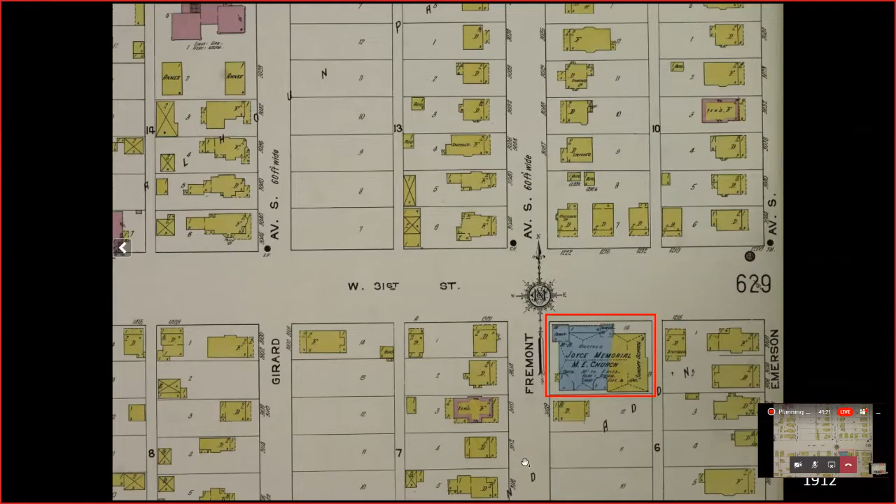In height, that is. The property does not exist within the boundaries of a small area plan or development plan adopted by the city council. It's also important to state that the current property owner has noted interest in developing the property as a multiple family residential building.

Landmark designation would promote the history of Joyce Memorial Methodist Church relayed through its unique California Mission Revival style architecture, and as an emblematic example of master architects Downs and Eads, who were known for creating significant revival styles at that time. The designation will preserve a rare piece of the city's architectural history in an area that experiences significant development pressures. Historic designation of the property would maintain the historic footprint, massing, and community prominence of Joyce Memorial as a neighborhood focal point at the notable intersection of West 31st Street and Fremont Avenue South.

The following policies of Minneapolis 2040 would apply to the designation of Joyce Memorial Methodist Church. Policy 92: identify and evaluate historic resources. The California Mission Revival style is not currently represented in the body of Minneapolis's locally designated historic resources. The property has been identified as the city's best example of a church that retains and conveys significance to this particular style.

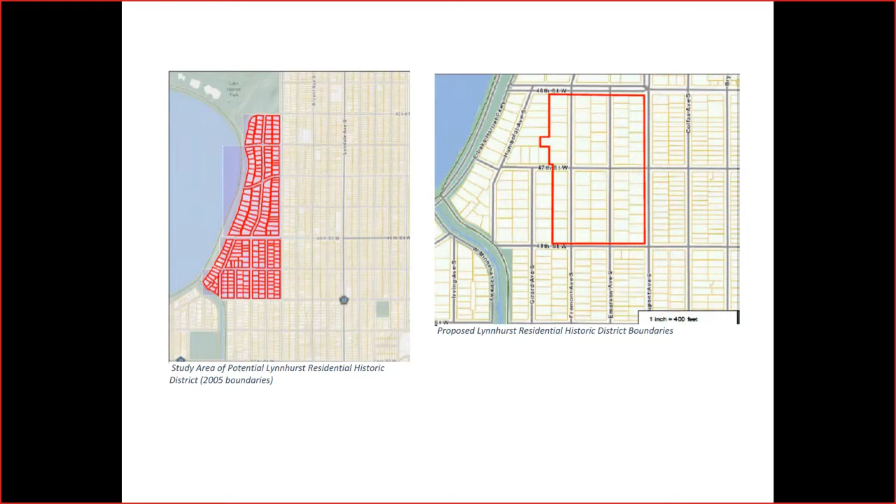In July 2019, the Heritage Preservation Commission placed a portion of the East Harriet and Lynnhurst neighborhoods under interim protection as a potential historic district after denying the demolition of a property at 4632 Emerson Avenue South. After surveying the study area, a local historic preservation consultant, New History, prepared a designation study completed in February 2020. The study area surveyed is bounded by 42nd Street West on the north, 48th Street West on the south, DuPont Avenue South on the east, and East Lake Harriet Parkway on the west.

The study, however, recommends a smaller historic boundary of 46th Street West on the north, DuPont Avenue South on the east, 48th Street West on the south, and both sides of Fremont Avenue South on the west, covering the Lynnhurst neighborhood only. During the study, it became evident that properties north of 46th Street West were larger in size and had more infill construction and substantial alterations.

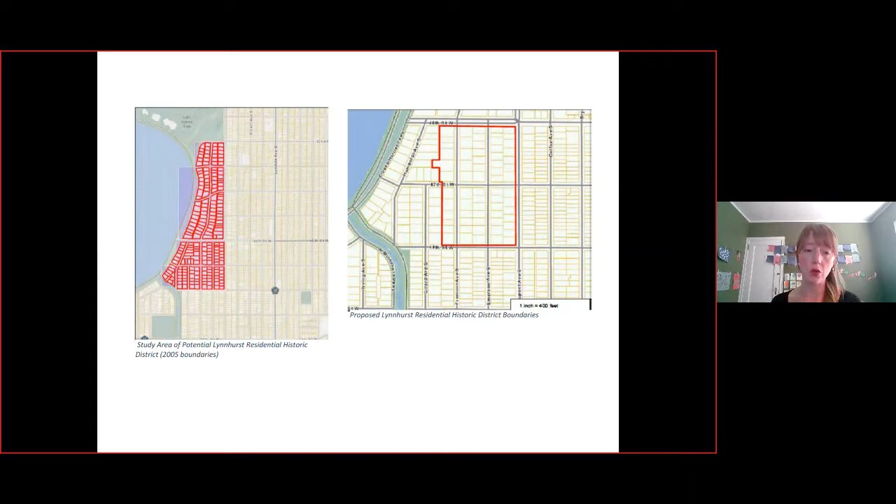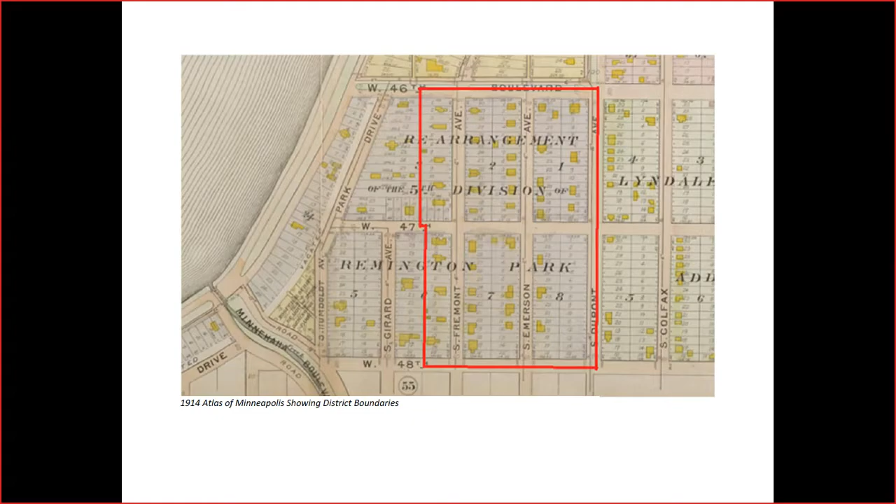The Lynnhurst Residential Historic District consists of 66 homes built between 1893 and 1937. The area encompasses homes that initially made up what's called the colony—9 families who settled on land sold by Charles Loring and built homes costing at least $3,000. The colony remained relatively isolated until after 1905, when additional development was spurred by the arrival of the automobile. The city's emerging upper middle class chose popular architects to design their homes in various period revival styles. Linden trees covered the area, and the lots were large enough to fit a large home and a separate garage. The historic district has excellent integrity, as only 2 houses are recommended as non-contributing.

The historic district has significance under 3 local criteria. Criterion 3 for its large lots, mix of architectural styles popular with the middle class in the late 19th and early 20th centuries, as well as similarities in setbacks, scale, and massing. The district features key character-defining elements of the neighborhood. Criterion 4 for its variety of period revival architectural styles popular during this time.

As well as criterion 5 for its development pattern as an early automobile suburb, with large lots lined with linden trees and houses sharing similar size, scale, architectural language, massing, and setbacks. Under Minneapolis 2040, the district is identified as urban neighborhood for future land use and is Interior 1 in the built form overlay. The designation of Lynnhurst would have no impact on the use of the properties and minimal impact on their built form, with Interior 1 guiding building heights between 1 and 2.5 stories.

Three policies of Minneapolis 2040 would apply to the designation of Lynnhurst. Policy 60: the Lynnhurst District represents one of the highest concentrations of houses retaining historic integrity among the city's designated properties, demonstrating the value of intact historic neighborhoods. Policy 92: Minneapolis doesn't have a historic district quite like Lynnhurst among its 18 currently designated districts—it's distinct because it represents a concentration of middle-class homes in popular period revival styles, and its development depended on increased automobile accessibility rather than proximity to streetcar lines. Policy 93: given the high degree of historic integrity in Lynnhurst, designation will encourage the maintenance and preservation of the houses within its boundaries.

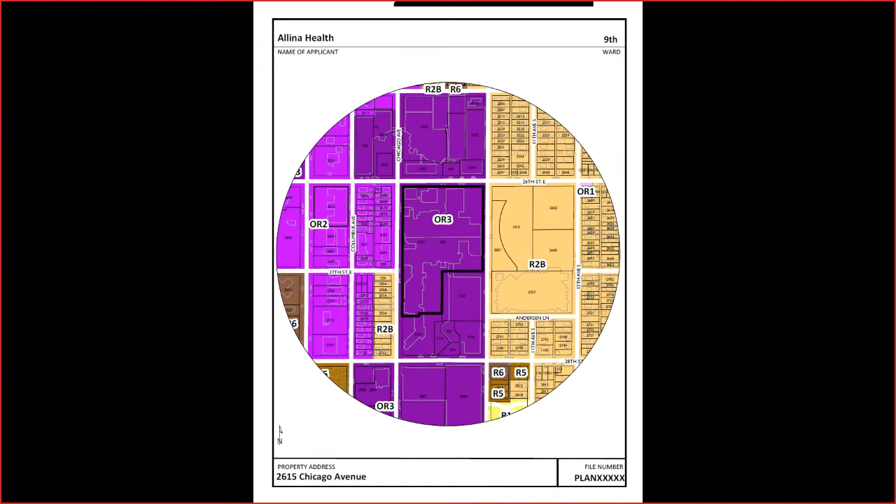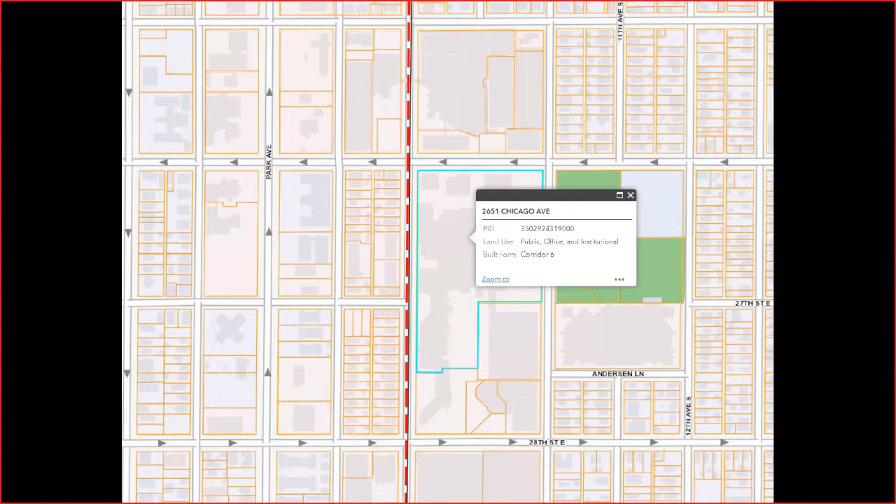The site is currently under the 2040 plan designated for public office and institutional uses and built form of Corridor 6. The portion of this larger parcel we'll be looking at is directly at the corner of Chicago Avenue and 26th Street. Chicago is designated as a goods and services corridor in Minneapolis 2040, which in general supports active and commercial uses.

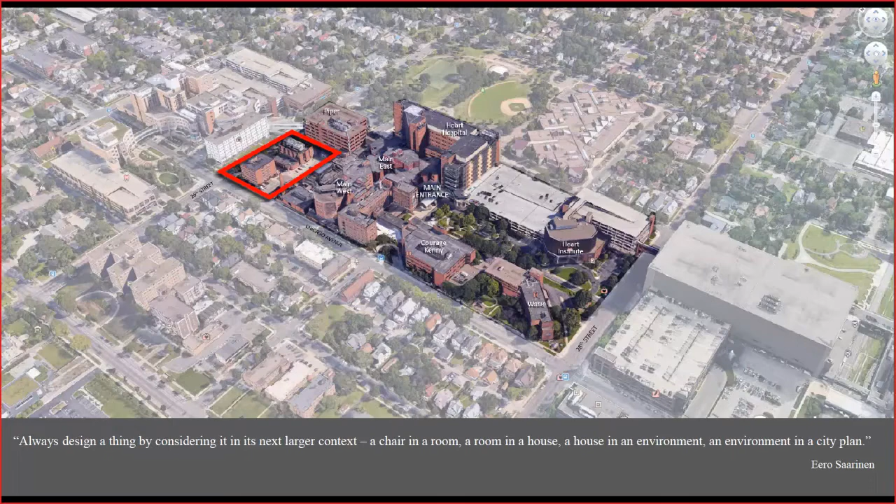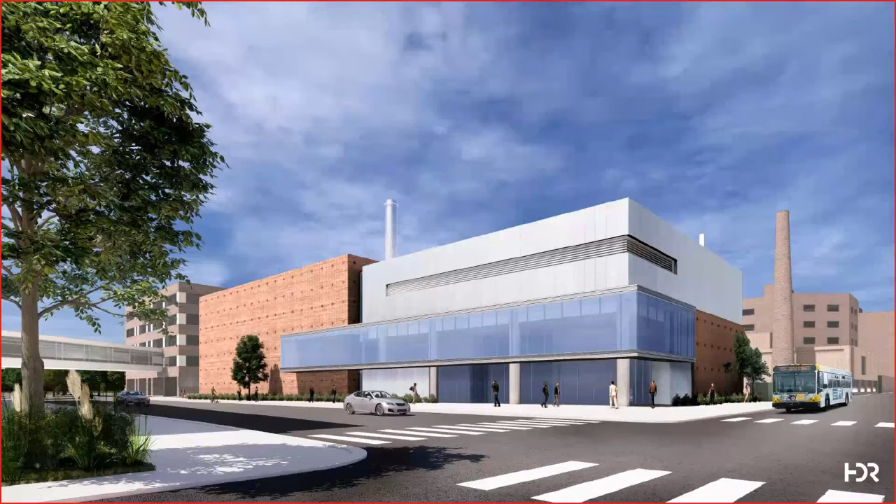So this is an image of the proposal. I'm going to let the applicant handle much of the detail about the design and how it relates to the campus as a whole, but essentially Abbott Northwestern is proposing to replace the existing central utility plant on the campus and construct a new one at the corner of 26th and Chicago. The current central utility plant is located just behind where you see this proposed structure, a little bit further to the south along Chicago Avenue. That plant would continue to operate until the new plant gets constructed, and this new plant would replace two existing structures on the site that would be demolished as part of this project.

So the applications involved in this are a conditional use permit for a new heating and cooling facility, a conditional use permit to exceed the maximum building height in the OR3 district - that's primarily due to the height of the cooling tower that's part of the facility - a variance to reduce the minimum front yard along Chicago Avenue from 15 feet to 0 feet, a variance to reduce the minimum corner side yard along 26th Street from 15 to 0, and site plan review.

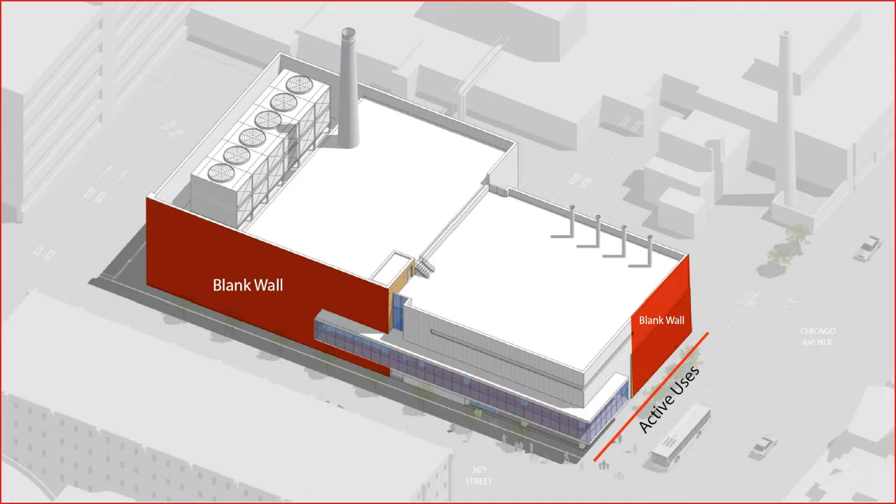So staff is looking for feedback primarily on some design issues with the central utility plant, with the challenge being that a largely inactive program on a very prominent site does not conform to site plan review standards for having active uses on the ground floor along the public right-of-way, for incorporating visual interest into a building design to enhance the public realm, and to mitigate any potential blank wall issues that arise from inactive architectural elevations. Chicago Avenue is adopted as a goods and services corridor and would generally call for the implementation of publicly accessible active or retail uses along that street frontage.

So I'm going to hand it over to Tony from Allina, who will give an overview of the campus master plan and how both of the projects we're going to talk about tonight fit into that. I believe he's waiting on the line.

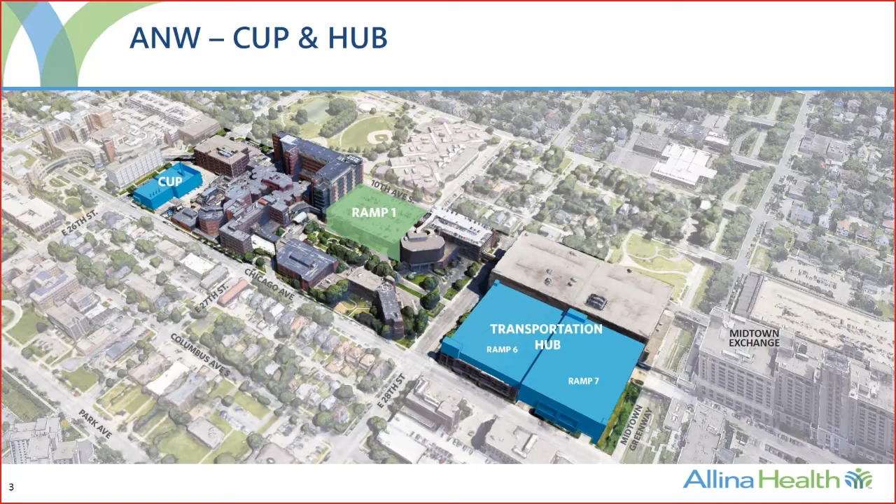Very essential. Our campus is pretty old. We've actually been on the site since 1882. It's important to point out that in addition to this large campus, just to the south of us, our corporate office lives at the Midtown Exchange Building.

They've just recently updated their lease through 2037. So we have a pretty big presence in this neighborhood, and we see that as an honor and also a responsibility to really do things right.

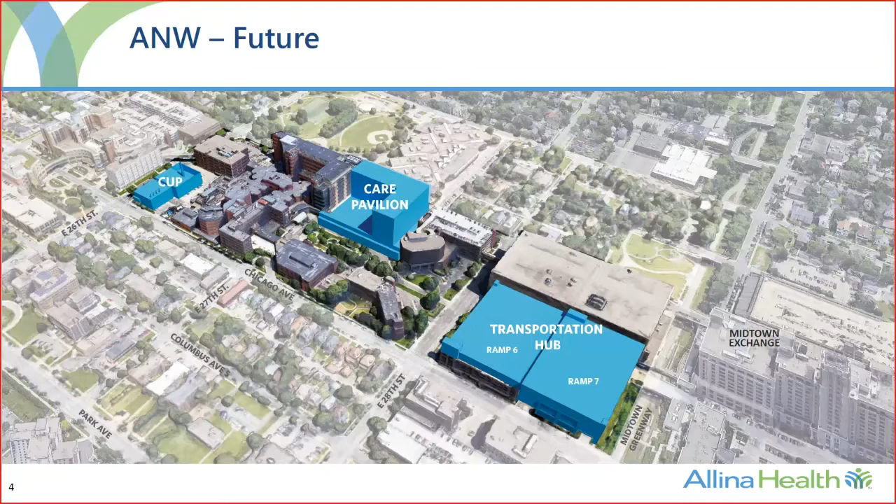Part of this process, as we've been working through this for the last few years, we've had a lot of meetings with our community and our local leaders. We've been really focused on being transparent and engaging our partners and really learning from them. So we've had 21 meetings and presentations over the last 9 months with a lot of local groups.

A lot of local leaders, and we've really taken their input to heart, and we feel like we've really incorporated their input into these designs. As Peter said, some of these buildings have a very industrial nature to them, and we've worked really hard to have something that will look good in our neighborhood. So I'll stop there, and Mike can take over for the CUP project.

Hi, this is Mike McGannon. I'm an architectural design principal with HDR. Thanks for the chance to walk you through the design of the central plant.

As Abbott approached this project, we took inspiration from this Eero Saarinen quote about always designing by considering a thing in its next larger context. In that spirit, we believe it's important to not only make this an integral part of their hospital campus, but

also to ensure that it enhances the streetscape, the surrounding neighborhood, and the overall community of Minneapolis. Our intent here is to create a quietly elegant and functionally efficient design that anchors and complements this prominent corner of the medical campus while continuing to reflect Allina's high quality of care.

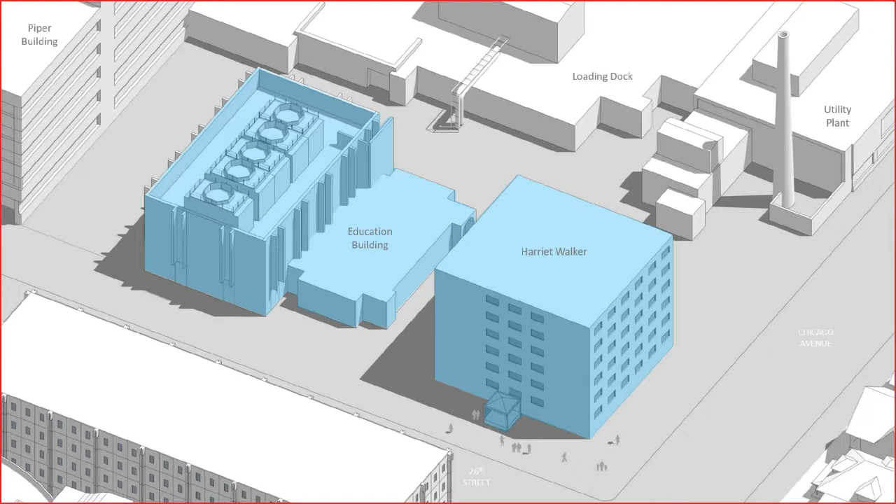So that transparent facade of the staff space consists nearly entirely of glass, and we've recessed it to provide some weather protection and add some visual interest at that front door, some shadow lines.

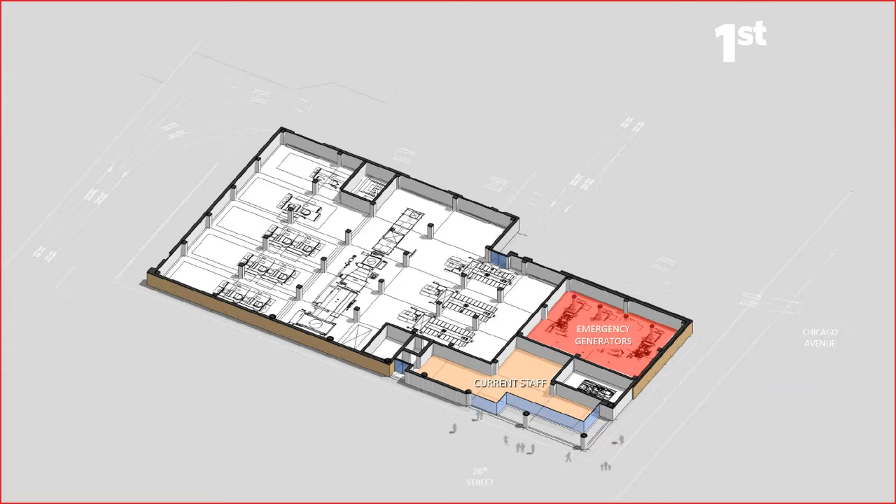Next slide, please. So as we go up one level, you can see the hospital has chosen to invest in shell space for expected growth in staff. So that has allowed us to provide even more floor-to-ceiling glass along a transparent cantilevered spine that you see, again, activating the corner.

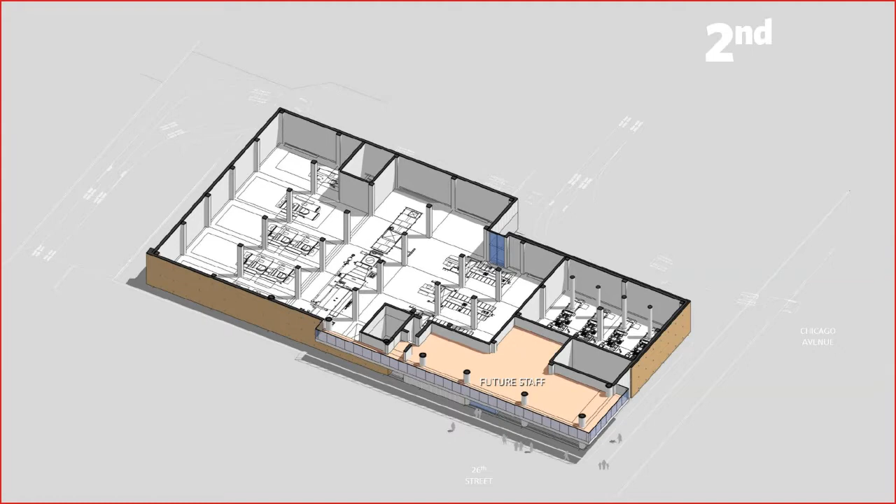This floor-to-ceiling glass spine pushes itself out to also provide some weather shelter and to break down the scale of the plant.

Next slide, please. The third level is the top enclosed level of the building. It's almost entirely electrical equipment at this point, with other equipment off toward the east of the building.

Here, you can see we're now above that second floor glass spine, but there will be a thin horizontal louver that will also enhance the facade and break down the scale.

As we go to the next slide, this shows the entire building and the distribution of exterior materials. The eastern half of this 26th Street facade, the main body of the plant itself, consists of brick with a renewed pin dot pattern, while the western half, mainly the people spaces that address the corner, consists of extensive glass with white metal panel and brick accent.

The cantilever glass spine on the Chicago Avenue side projects from the second floor, and then it bends around the corner to stretch to the east toward 26th Street, visually tying together the plant functions on the left and the people spaces on the right.

Next slide. So this rendering shows the ultimate design. It refreshes this northern gateway to Abbott's campus in a way that enhances the neighborhood.

And through its dual expressions of the plant and the people spaces, it utilizes the pin dot brick cladding to tie it back to the campus, while its taut metal skin lightens and balances the overall appearance to give a nod to the future for the campus. Thanks.

All right, Peter, do you want to add anything further, or should I open it up to staff here? It's odd not to be able to see everybody. We can just go ahead and open it up for comments from the commission. Very good. Commissioners, comments, questions, etc.

Commissioner Luke Dupier: Yeah, I had a few questions for the applicants. I was wondering if they could elaborate a little bit on whether or not any of the functions in those generator spaces and the electrical floors — I can see why you would not care if people could see in or out from a functional standpoint, but is any of that equipment actually light sensitive, to where having light or something that would give it a more pedestrian scale would harm the equipment, or is it just that way?

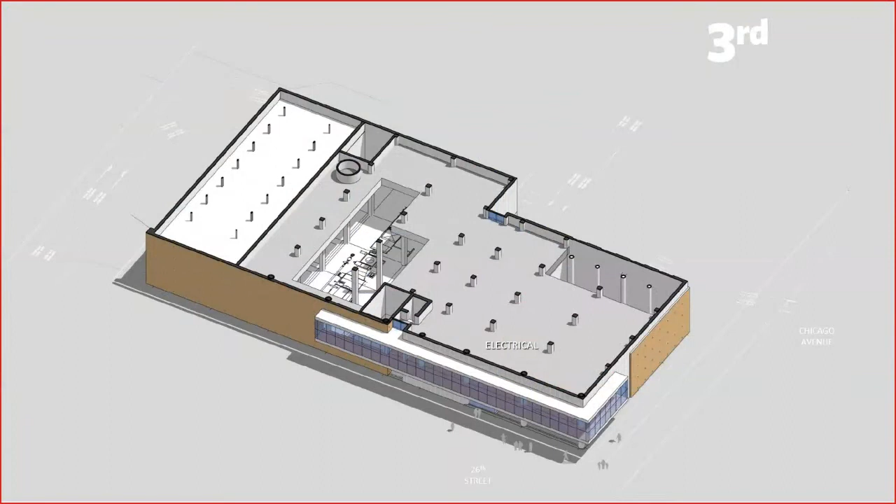I'm wondering about what the pedestrian experience is walking along both streets. I don't really think of this as a gateway because I think traffic approaches this building from the opposite end of both blocks. Is that not accurate? Yes, traffic approaches this from the north, so I don't really think it's a gateway.

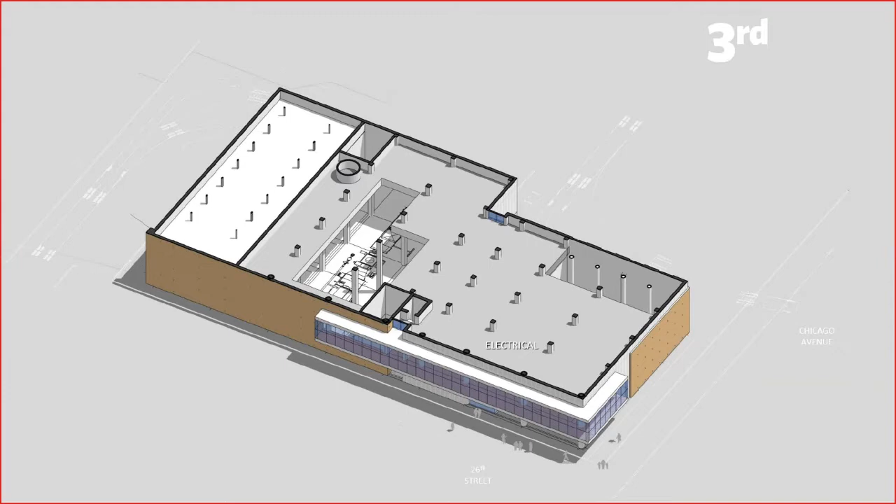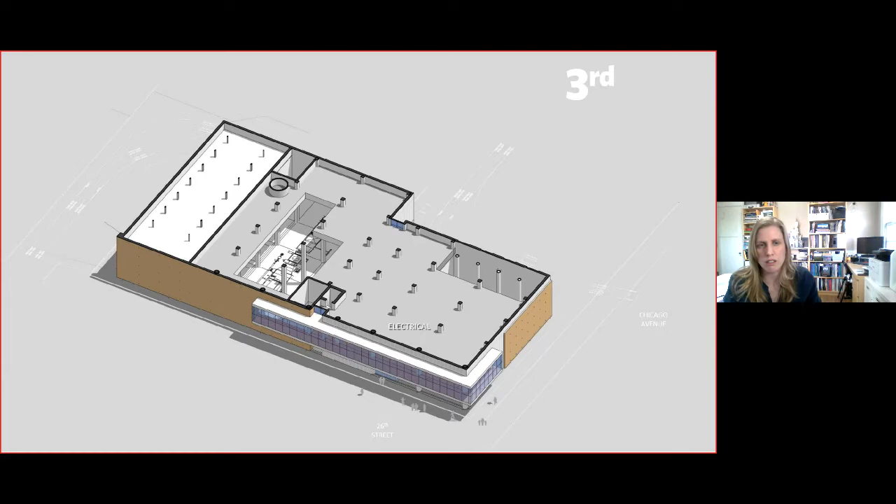I do think you're right about it addressing the corner, but we still have these large swaths of essentially brick fortress wall on a significant portion of each side of the building that faces a public street. So I'm wondering what your plans are to mitigate that, other than the pin dot thing, which is a very nice texture, but doesn't really get to that whole addressing more eyes on the street sense of safety. And if you could maybe outline, in terms of the campus itself, who might be walking past this building from where, to determine whether or not this is going to be impacting pedestrians on a regular basis, or if this is more of almost like a back service street where anyone on campus won't really be walking. I'm trying to get a sense of this facade. And actually, if we can go one more elevation up on the slides, that'd be great. Thanks.

Well, as far as relieving the scale of the wall, certainly I think the brick pattern is one way that contributes to that. But more than that, and really in combination with it, a slide we didn't see was the landscape plan. It is our intent to have landscaping along both of those brick facades that you see on Chicago and on 26th. In fact, for the facade on 26th, it will essentially turn into its own natural green wall, because we are proposing planting ivy there that will climb onto these pin dots.

So you're saying that the texture of the wall is your mitigation for the blank wall provision? To some degree it is, combined with the landscaping. We had earlier proposed opening the wall up quite a bit and adding a lot of glass, but there was community concern about the light pollution, because these spaces are lit 24 hours a day, and we wanted to be respectful of that as well.

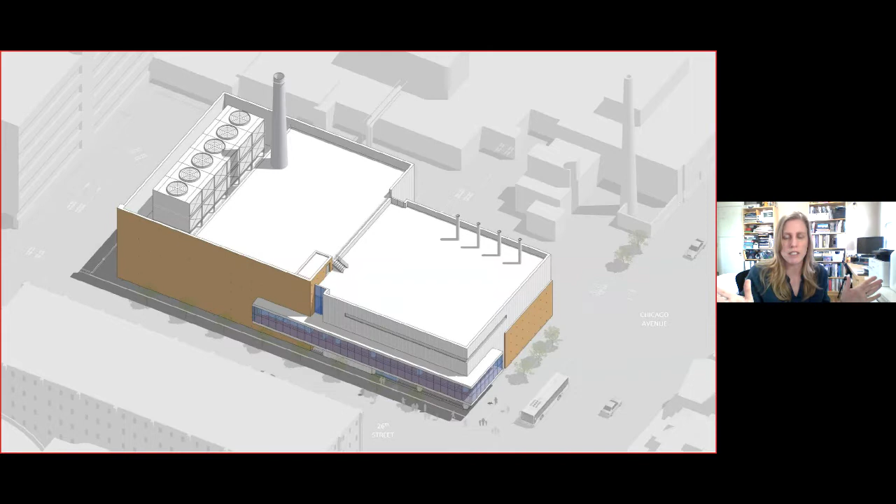And what's across the street from where those openings would be, though, that would receive that light pollution? Because I'm thinking of a hospital campus that's kind of a 24/7 environment anyway. Granted, more busy during the day, but emergencies happen a lot, workers are coming and going. So what are there, houses? What's directly across from these facades that would be impacted by that?

Directly across from the 26th Street facade is an office building. Directly across from the Chicago facade are single-family homes. Okay, so on the largest facade, it's an office building that probably no one's going to be there at night to see any light pollution. It's just the Chicago side, which is the shorter of the brick walls, that would maybe be more impacted. Is that correct? I think that is accurate. There was also some concern about dark sky pollution, but you're certainly correct. Okay, thank you. All right, Commissioner Sweezy.

Commissioner Lukey-Peer had a lot of the comments that I would raise, I'd just like to add my voice to it. First of all, I think that this is a good project and a necessary project. I know your hospital, and it certainly needs some updating and modernizing.

And I get with that obviously comes, it's an institution, so it's going to have some institutional feel to it. I agree though about these blank walls, and I'm not sure that as rendered there's sufficient mitigation for me in it. I tend to not be the biggest believer in the green wall as a substitute for that. And so I agree that particularly along the Chicago Avenue frontage, there's a bus stop there, so there will be people there.

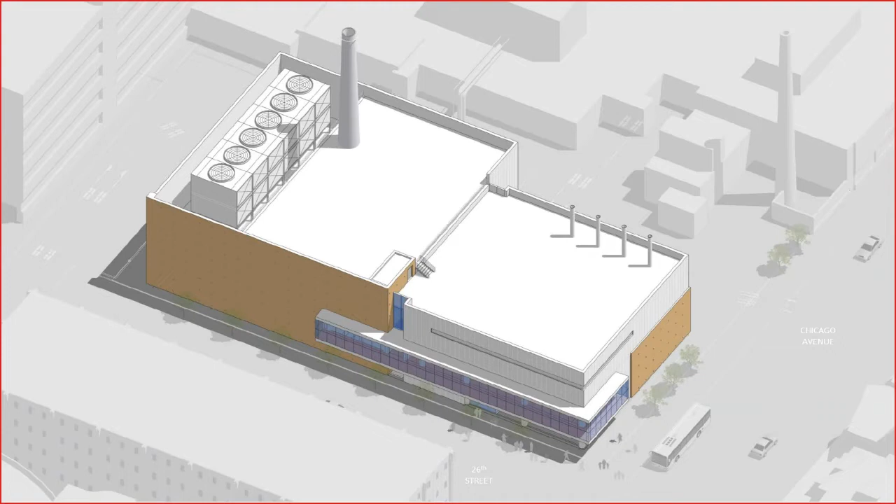I'm not seeing any more comments. Just to sum up, we've got the blank walls taking up a fair amount of discussion here, and whether that's looking at redistributing some of those office spaces into more active spaces so they continue to hold the corner, or moving those spaces from 26th onto Chicago Avenue if possible, and starting to shed some light, literally and figuratively, on what is happening inside the building as a way of creating some interest. I'd add, on a personal note, this is an important institutional use.

I think there are ways of really stepping up how these buildings work in the urban context, thinking of the building not just as a vessel but as a kind of work of art in times when you inherently need blank walls, like the salt shed in New York City, or other examples where there's something interactive and the building itself is thought of differently. I'm not convinced the brick articulation is really making up for what this needs to be active.

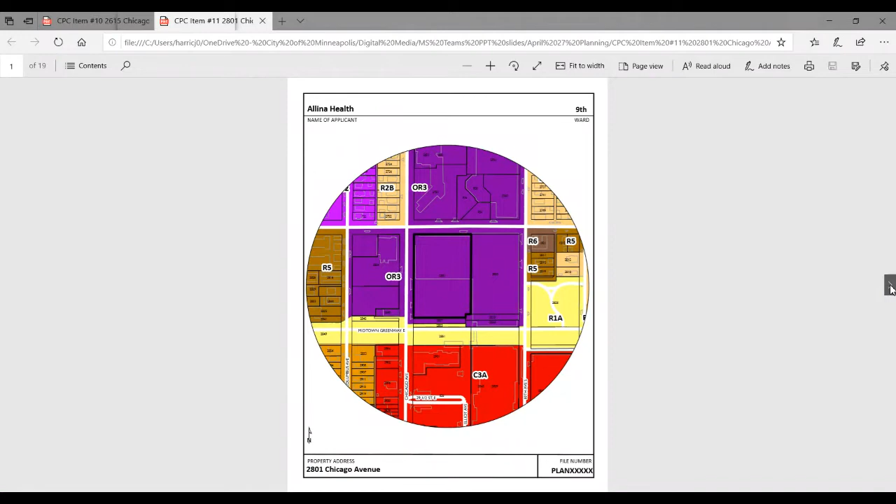The site is also zoned OR3. It's located at the corner of 28th and Chicago, adjacent to the Midtown Greenway, which you can see along the south edge of the property. It includes one large parcel containing an existing parking ramp and a large surface parking lot, and a smaller liner parcel to the Midtown Greenway, just south of the property, currently owned by the City of Minneapolis, which the applicant is seeking to purchase to incorporate as part of this project.

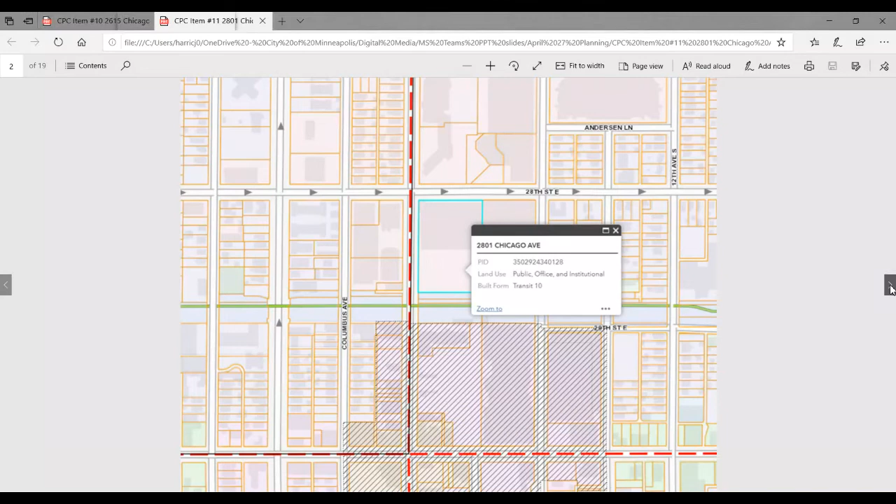The future land use guidance under 2040 for this site is similar to the previous site, in that the land use guidance is for public, office, and institutional uses. However, the built form allows for up to 10 stories under the Transit 10 category. It should be noted that the parcel immediately south of the larger parking parcel, the liner parcel to the Midtown Greenway, is currently guided for parks and open space uses in the 2040 plan.

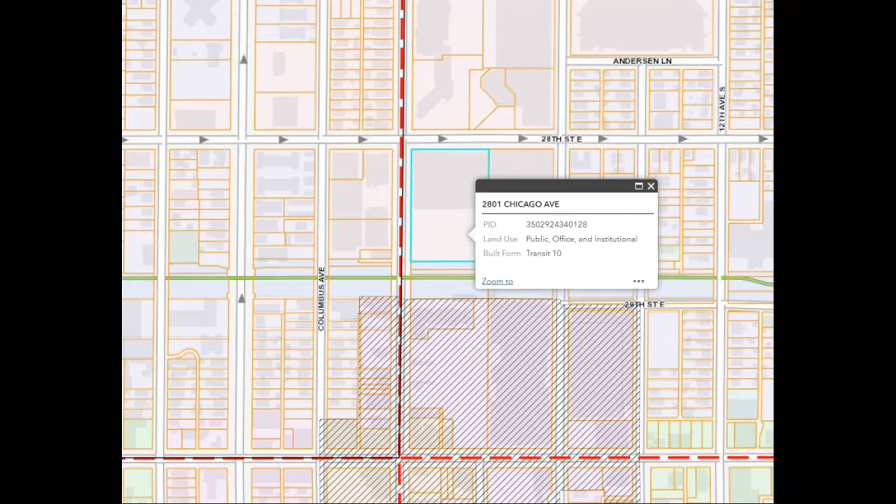This gives you a sense of where that structure will be located in relation to the remainder of the Allina and Abbott Northwestern campus. You can see at the corner of 28th and Chicago there is the existing ramp, and then the surface lot adjacent to the Midtown Greenway.

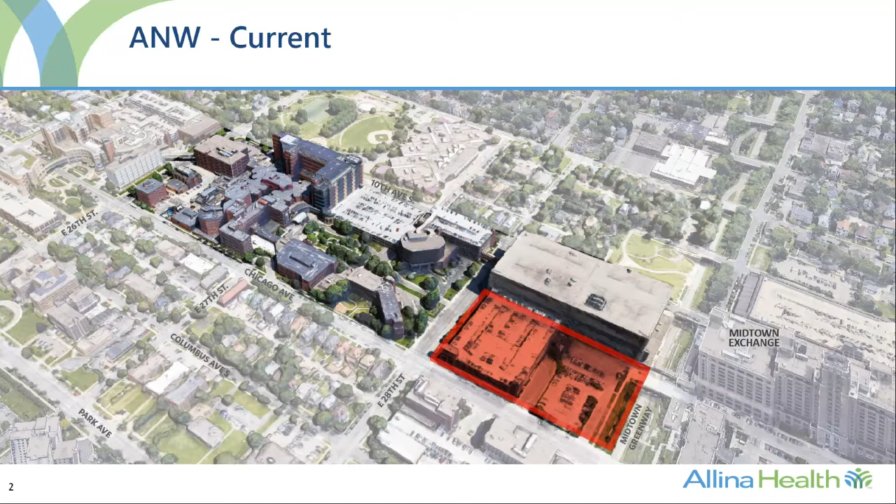The applications associated with this project are: a conditional use permit for a principal parking facility; a conditional use permit to exceed the maximum building height in the OR3 district, going from 6 stories to 8 stories; a variance to the maximum floor area ratio from 3.5 to 6.85; a variance to reduce the minimum front yard along Chicago Avenue in the OR3 from 15 feet to 5 feet; a variance to reduce the minimum rear yard along the east property line from 15 feet to 0 feet; and site plan review.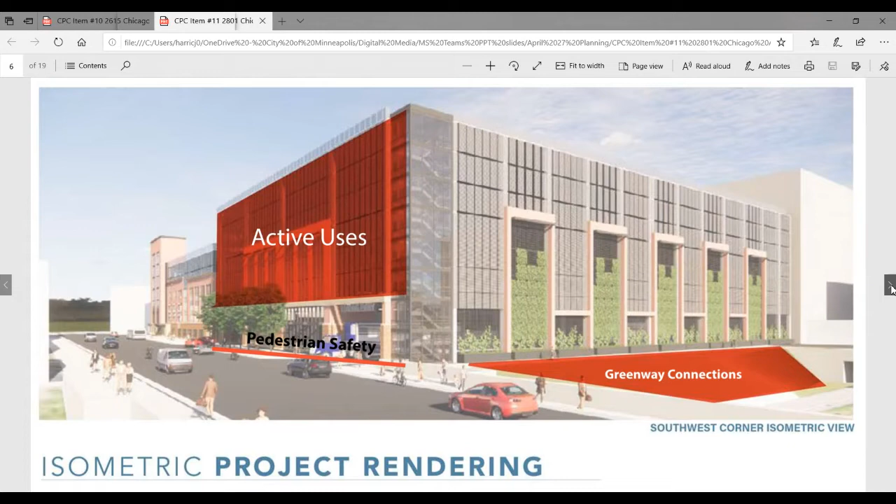But that parcel, currently owned by the city and guided for parks and open space, does provide some opportunity to think through that as a possibility.

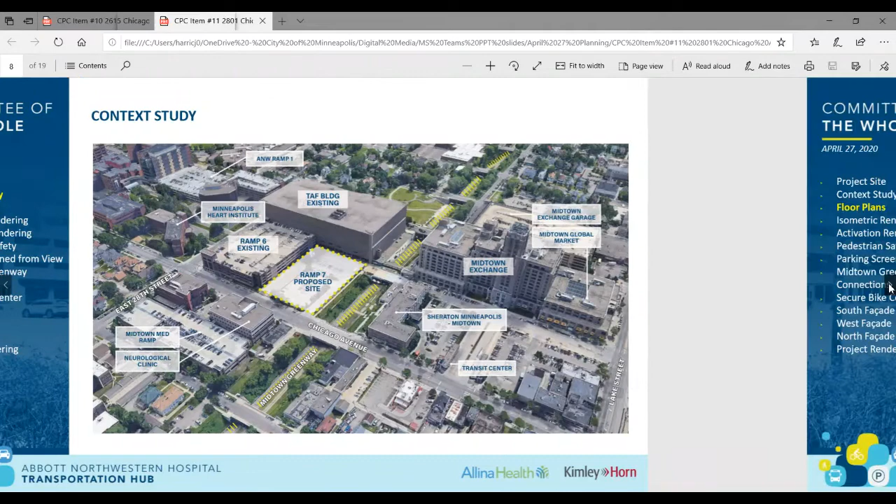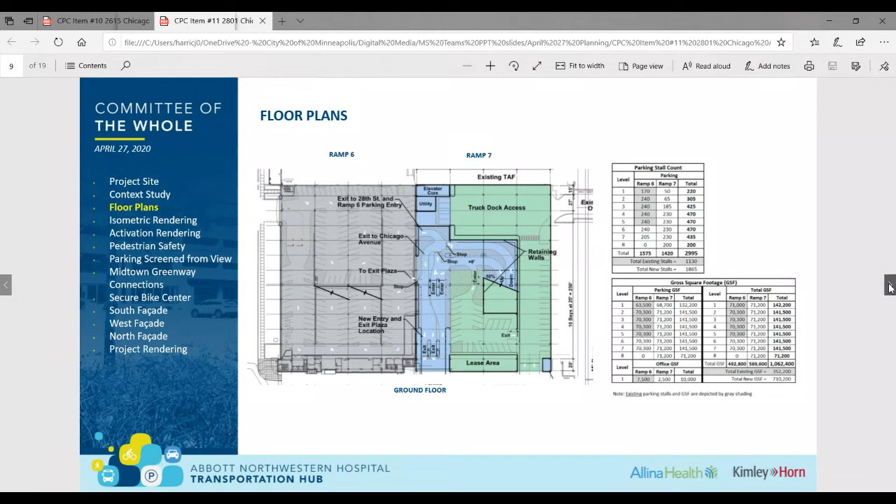Here's a schematic plan for the ground level of the transportation hub. Ramp 7, the new facility, is shown in color, and the existing layout for ramp 6 is on the left, shown in gray. North is to the left on the graphic. These two ramps will ultimately function as one transportation hub. In green on the right side of that image, you can see the existing truck dock will be maintained under ramp 7, and the existing access in blue to ramp 6 will be maintained and utilized for access to both ramp 6 and 7 using the same access points.

Here's a rendering of the transportation hub as seen from the Chicago Avenue Bridge over the Midtown Greenway on the southwest side of the site. The architecture draws in the different environments happening at this corner of the campus, including the green landscape of the Midtown Greenway, while successfully activating the frontage along Chicago Avenue and creating a cohesive feel between the two facilities, which will ultimately be one transportation hub. You'll notice in this image the truck leaving the loading facility at the access point closest to us — now that the existing loading dock is covered, it's screened from view. It does a great job of softening this corner of campus while bringing in the greenway and activating the street frontage.

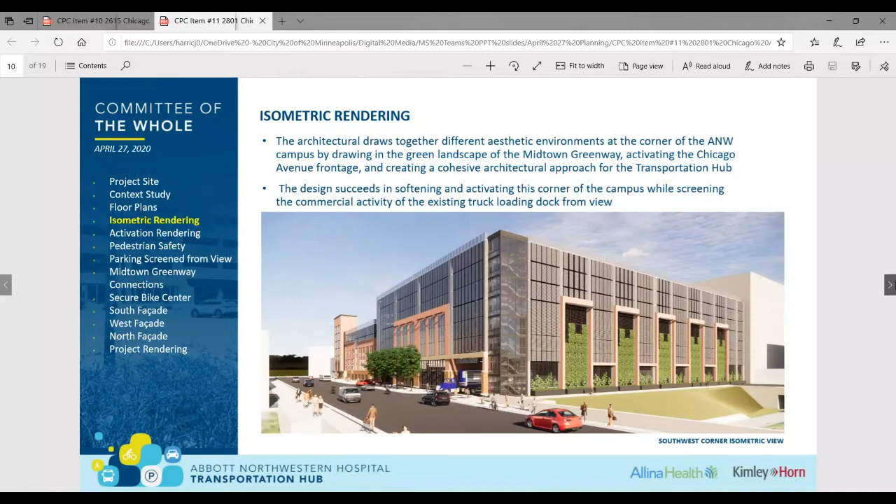In this image, we've zoomed in a little closer to the west side of the transportation hub. This is the activated space on the ground floor. The top image is looking northeast, and the bottom image is looking southeast towards the same area of the facade on that west face. The space between the entrance into the transportation hub, noted as parking entry in the lower image, and the truck loading dock access to the south will be the active office and retail space. We really want this space to be a meaningful part of the community.

For that reason, we've been very intentional about who might occupy this space. We're in active conversations with several prospective tenants, including the Greenway Coalition and Our Streets Minneapolis, who have both responded very positively to the idea of being in this space. We're really excited about that.

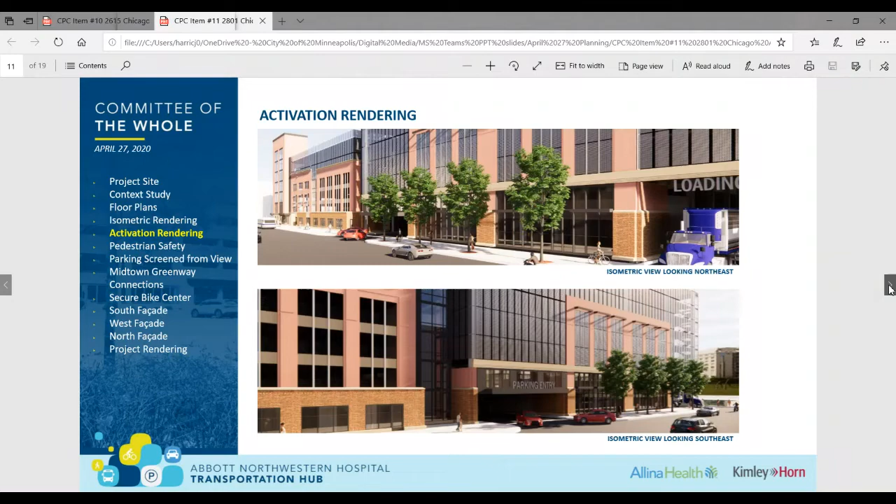Additionally, the existing curb cut at the entrance into the parking ramps will be narrowed by 5 feet to make that crossing an even safer crossing for pedestrians.

The design team is also reviewing different solutions for improved pedestrian safety at the entries and exits from and into the facility, which will likely include signage and messaging to vehicles to increase awareness as they approach the crossing, and appropriately locating access control equipment within the parking garage to control vehicle speeds as they exit the facility.

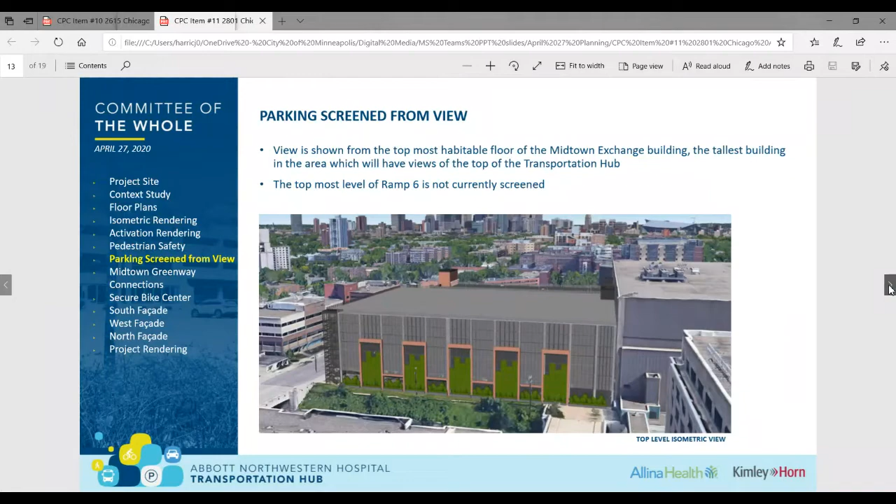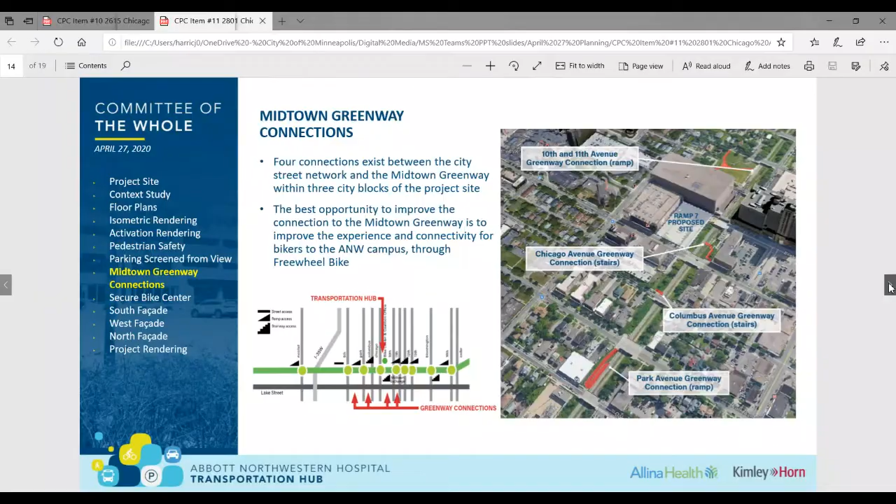Since so many existing connections already existed to city streets, the design team reviewed different options to improve connectivity to the Midtown Greenway and that important asset. As we identified different options, the focus was to improve the experience and existing connectivity for bikers to Abbott Northwestern through the Freewheel bike shop, located on the Midtown Greenway. I'll show you exactly where that's at on the next slide.

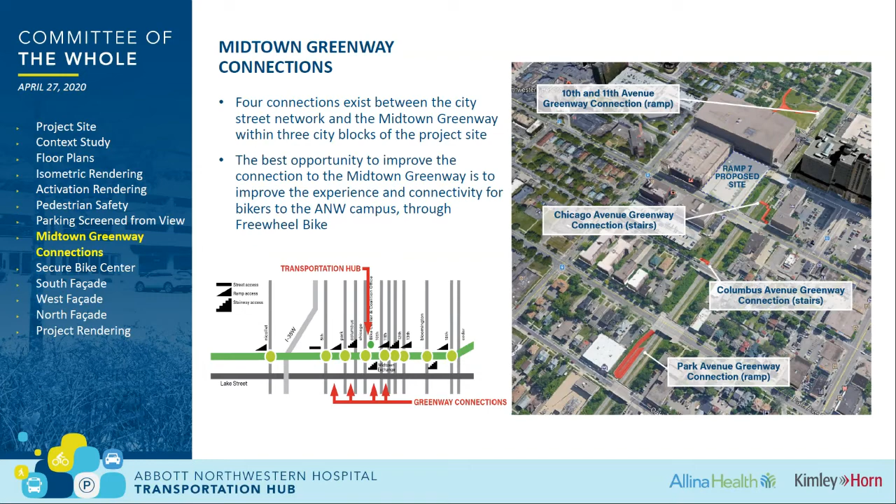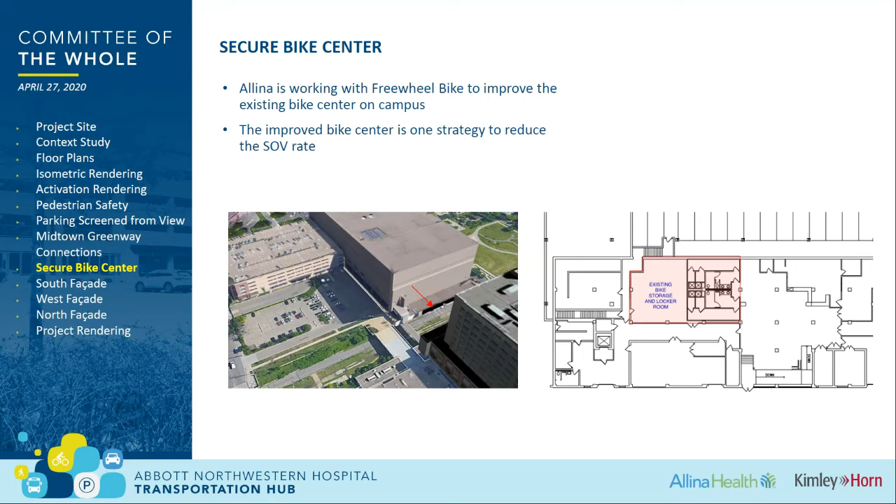Now I'll just talk briefly about the proposed architectural facade. You've obviously seen it in the renderings, but we'll talk just a little bit more here.

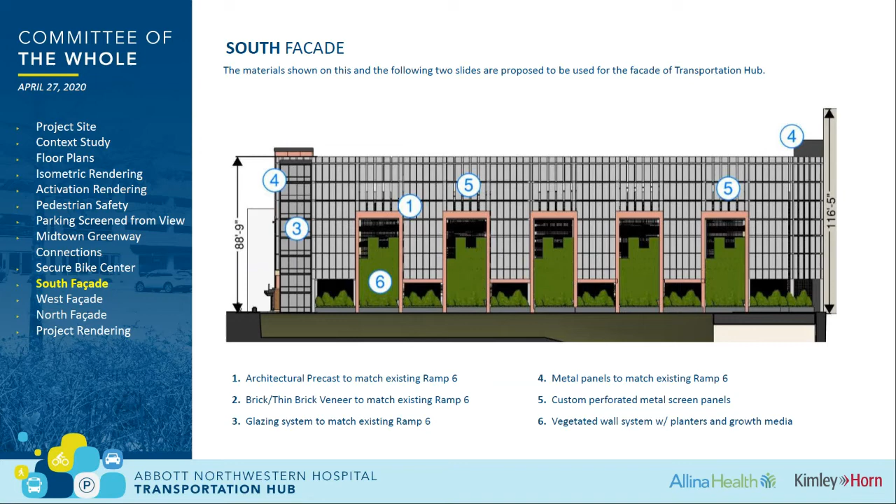This is the south facade, which faces the Midtown Greenway. This facade will be made up of perforated metal panel, shown in gray, with some limited amounts of precast shown in beige to break up the metal panel, bordering a vegetated wall system that will include planters and climbing vines to create a green wall that pulls in the aesthetic of the Midtown Greenway and softens and breaks up this elevation. Next slide, please.

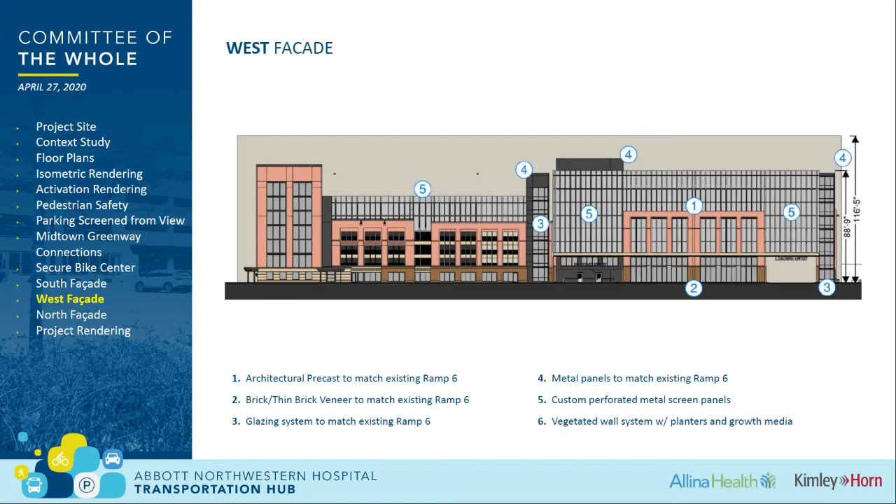This is the west facade, which faces Chicago Avenue. This elevation will be comprised of metal panel and precast to pull in some of the architectural components of the south facade, but meld the existing architectural approach of ramp 6 into ramp 7 to create one cohesive approach on this elevation. Next slide, please.

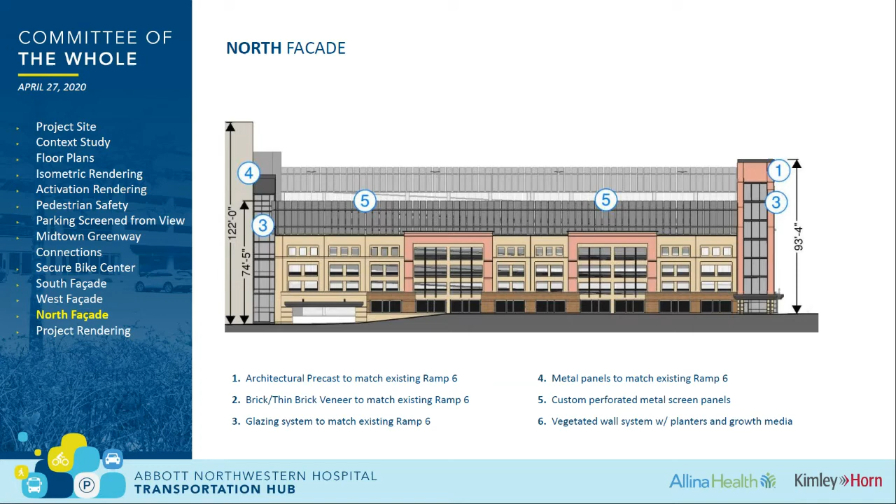Commissioners, questions, comments, etc. for the applicant. Commissioner Luke here.

Hi, so I have a few questions and they kind of jump all over, so sorry about that in advance. Number one, on the south facade, you mentioned there's a perforated metal panel. I was just wondering what the patterning of it is. Is this just a generic grid, or is this some sort of overall larger vision? We've been seeing a lot of different textures being introduced into facades this way in recent projects, so I'm just wondering if you've selected that yet, or if that's not something you're exploring.

Yeah, thank you, Commissioner Luke. We're still looking at the perforation pattern and sizes. Obviously, from an openness standpoint, we need to maintain openness of the parking facility. But at this point we haven't necessarily assessed different patternings associated with the metal panel itself. Right now it's been proposed to be more of a consistent pattern of openings.

Okay, I'd be interested to hear what my fellow commissioners think of the green wall, climbing wall thing going on, but almost as an artistic element as well, just to make the whole facade interesting, especially given our current appreciation for the medical workers and first responders who are there. It might be an interesting opportunity for art in a not loud way.

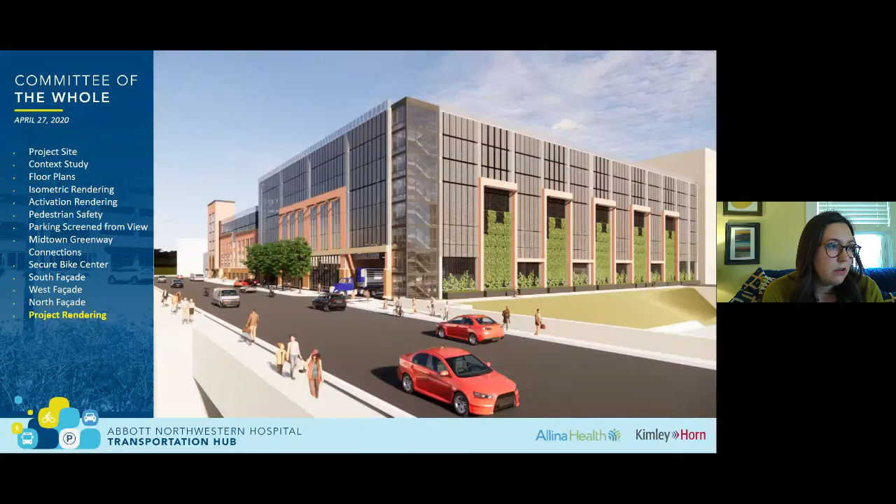Yeah, we're doing studies right now, which include some benchmarking and talking with Allina as we drive towards a reduction of single occupancy vehicles. The intent is to increase the number of bike storage options within the Freewheel bike area, and improve the facilities within that area to enhance the bike user experience, to really encourage that to happen more and more as staff are using that, hopefully more frequently, to get to campus.

Thank you. Thank you. Commissioner Marwa.

Hi, quick question. Commissioner Luke mentioned this, but about the green wall, when it's not in season and not seasonally acceptable to be green up there, have you thought about alternative art measures that you're planning to put? You could do with that kind of grating that you have, a lot of different yarn bombs and temporary kind of cool public art.

Have you thought about that, or allowing that, or found partnerships in that realm? Commissioner Marwa, I think it's a great comment. I'd have to defer some of that to my architectural partners. However, I know we have talked about the challenges of off-season color and trying to draw in that green effect, and we're still working through solutions to try to address some of that.